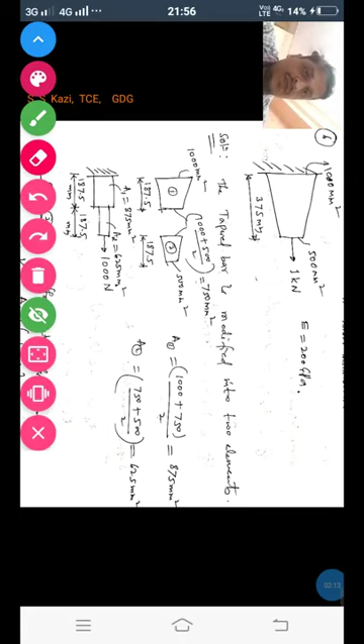Next, the area of step 2, that is element 2, will be the average of the mid section area and the right side area 500 mm square, that is 750 plus 500 by 2, we will get 625 mm square. I have shown for step 2 the area is 625 mm square. This is how we have modified this tapered bar into a stepped bar by considering the average area.

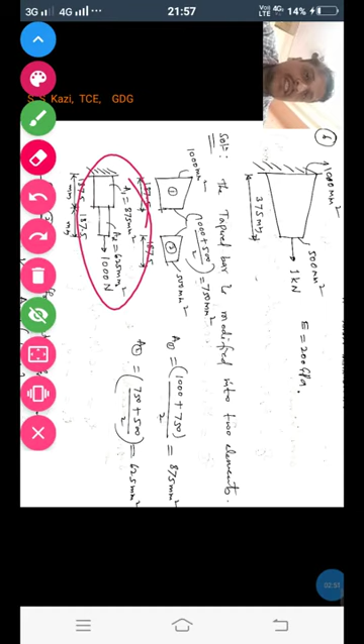Now here 875 mm square is the area of element 1 and 625 mm square is the area of element 2, and this is the load applied on the right end of this tapered bar, that is 1 kilonewton. Here I wrote 1000 Newton. Once you modify this tapered bar into a stepped bar, let us consider this stepped bar to solve for the unknown nodal displacements, stresses in each element and the support reactions as explained in the previous videos.

If you discretize this stepped bar, we will have two elements and three nodes. After that, generate the stiffness matrices for both elements K1, K2. Assemble these two matrices and get the global stiffness matrix of the order 3 cross 3. Then write the global equilibrium equation Ku is equal to F as explained.

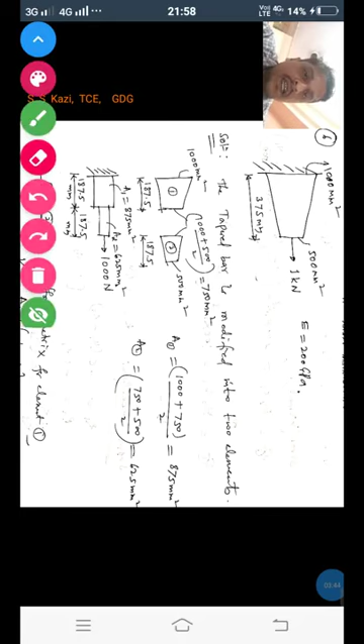Next, solve the equations by applying the elimination approach, so that we will get U1, U2 and U3 values, and compute the stresses in each element using Hooke's law, and the support reactions using the elimination approach as explained in the previous videos. Okay, this is how we can modify the tapered bar into a stepped bar. Next, I will consider one more example so that you will understand better.

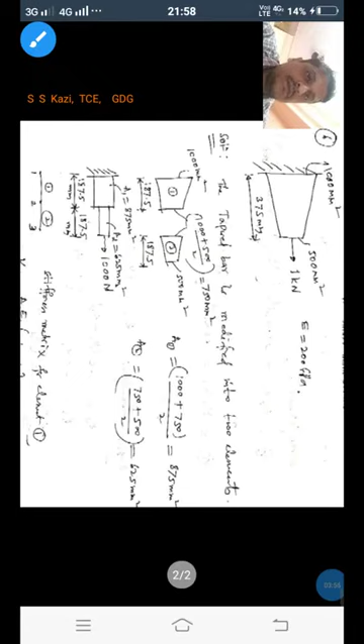Let us consider one more. This is the tapered bar, the second problem. Here you can observe this tapered bar is varying in width, not area, varying in width from 60 mm to 30 mm. Now here again modify this tapered bar into two steps, step 1 and step 2. Okay, now we got here

step 1, the top width given is 60 mm, and at the mid section of the tapered bar we should consider the average width, that is 60 mm plus 30 mm divided by 2, that will give you 45 mm. Here also the mid section in step 2 is 45 mm average width, and this is the bottom end, that is 30 mm width, which is already given. How did we get this average width 45 mm? Let us prove it.

If I consider this as a right angled triangle, tan alpha will give you opposite side divided by adjacent side. If this is 60 mm and here 30 mm is given, then this dimension will become 15 mm and 15 mm. Therefore the opposite side is 15 mm, and the adjacent side will be the length of this tapered bar, that is 240 mm given. Hence tan alpha is equal to 15 by 240, we will get alpha is equal to 3.57 degrees.

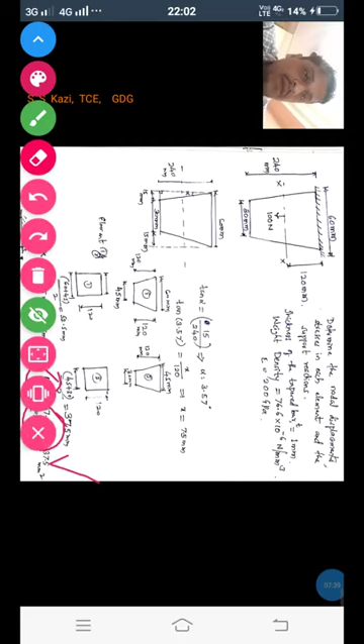Hence the area of element 1, A1, is width into thickness, 52.5 into 1, you will get 52.5 mm square. For the second step, the area of element 2 will be width 37.5 into thickness 1, you will get 37.5 mm square. This is how this tapered bar is modified into a stepped bar having two elements, element 1 of 52.5 mm square area and element 2 of 37.5 mm square area, of lengths 120 mm each.

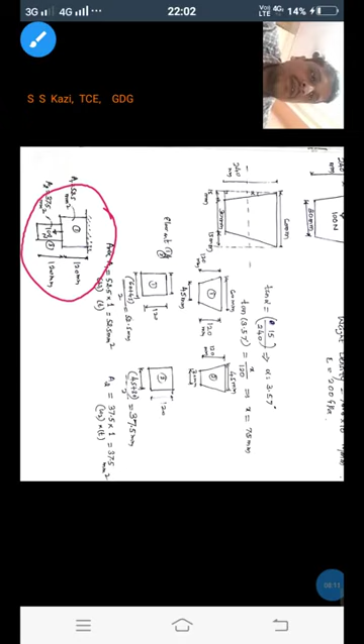After that this stepped bar is considered to determine the unknown nodal displacements, stresses in each element and the support reactions by using the elimination approach as explained in the previous videos. I hope you have understood how to modify this tapered bar into a stepped bar.